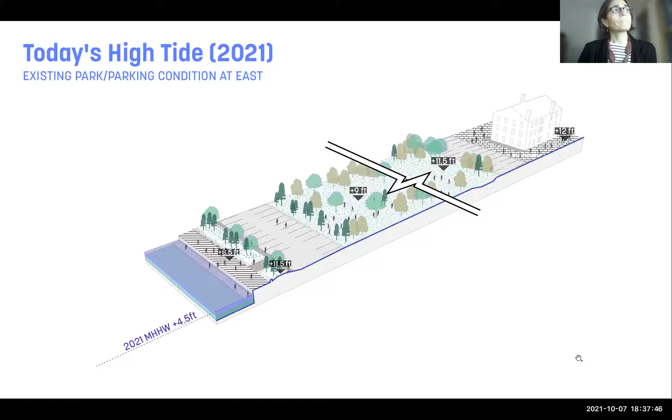In the future, with predicted sea level rise, we've looked at several models of this and have a consultant on our team, VHB, who's really been helping us understand what the best models for sea level rise to use are. The future predicted high tide, again happening twice daily in 2070, is at 8.7 feet. So you can see that will inundate the boardwalk itself and portions of the access to the boardwalk on the east side. And then, not shown here, on the west side of the park near the boat ramp, there are areas of the actual landmass that would also be in that daily tidal zone, again twice a day by 2070.

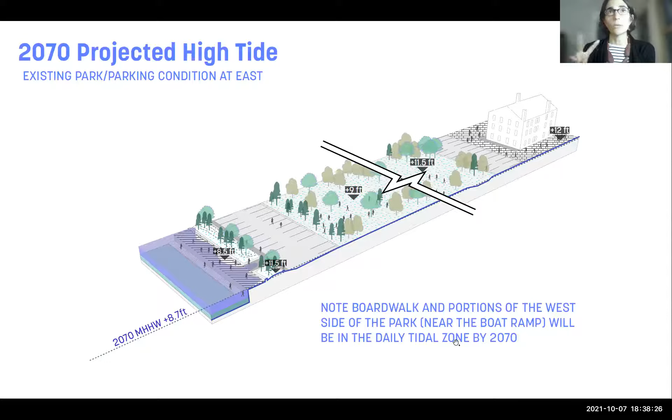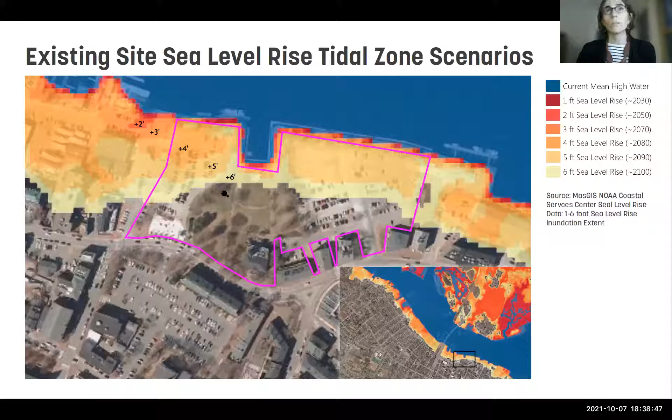And you can see here in this map that same condition, again on the existing site, showing that by 2070 there would be some areas of flooding on the west side of the park. Certainly all of the areas right along the shoreline at the boardwalk would be in the tidal zone. And then more areas in the tidal zone by 2080, 2090, and 2100.

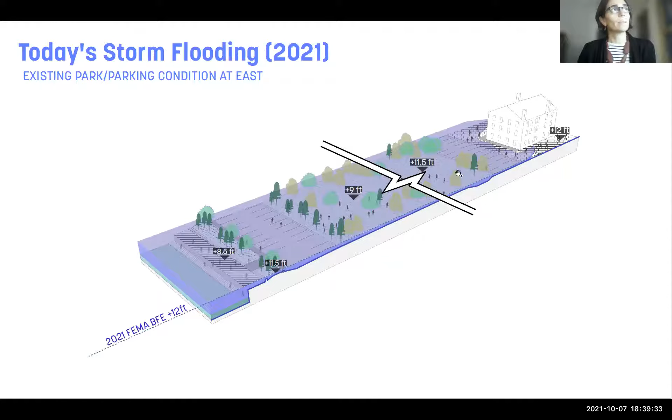So then the second piece of the picture when it comes to sea level rise and living in a coastal community is storms. This is showing the flooding extent for the 100-year storm, which means there's a 1% chance of that storm happening every year. You can see that elevation that has been set by FEMA for flooding is at 12 feet. So already today on the east side of the park area, you have flooding that occurs on the order of 4 feet or so at the lower elevations of the park, all the way back towards the street at lower elevations, or lower depths of flooding.

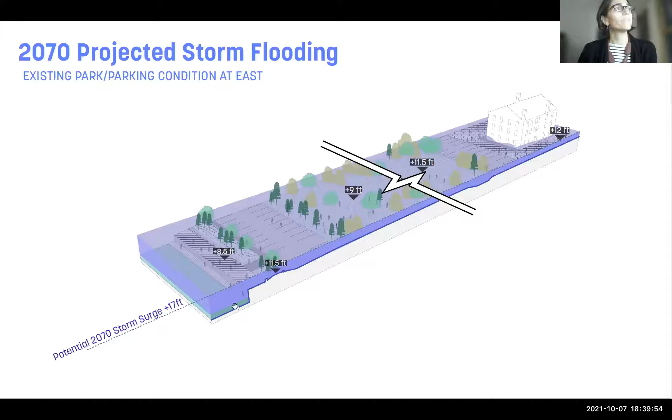Really the condition as you go towards 2070 with sea level rise, that projected storm surge gets up to about 17 feet, which puts that whole landmass under more like five and above levels of flooding. So quite a bit of flooding already predicted to happen on the site.

This map here really just puts that into context on the existing site. And what it's mapping is in 2070, when there's a storm, so during the 100-year storm, the depth of water that is expected across this site.

So you can see it's really quite deep, closer on the lower parts of the site, which are currently the boardwalk, and closer down to the water's edge, up to about 10 feet of water. You can see that inundation comes all the way in, past the street in some places.

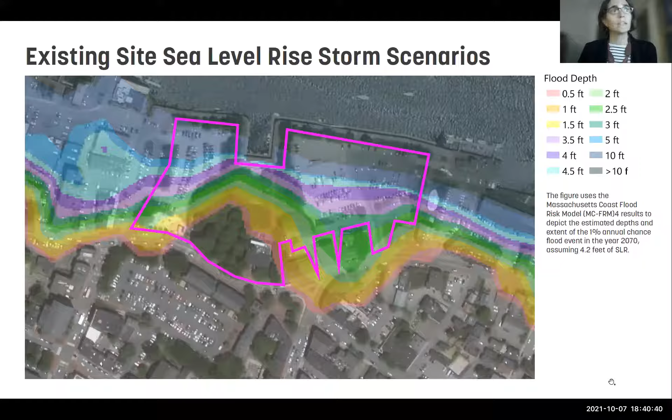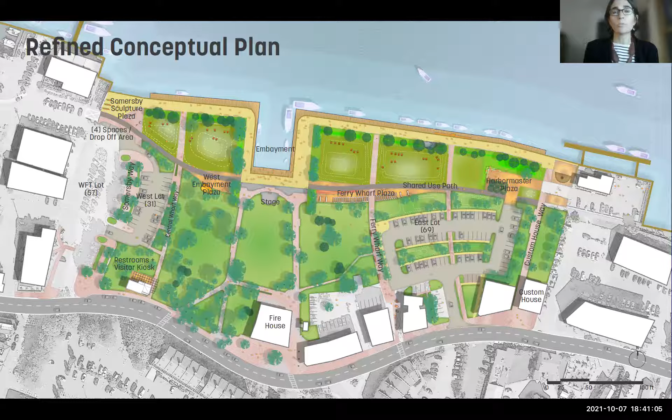These are models that are already widely circulated and trusted for coastal resilience planning throughout Massachusetts and beyond, and we've applied those to the design of the site. So this again is that site design. What we're going to do now is walk you through a series of diagrams showing how, if the park itself is the only thing implemented from a design perspective, tidal inundation and flooding from storms would affect the park. Then we can talk about future improvements as well.

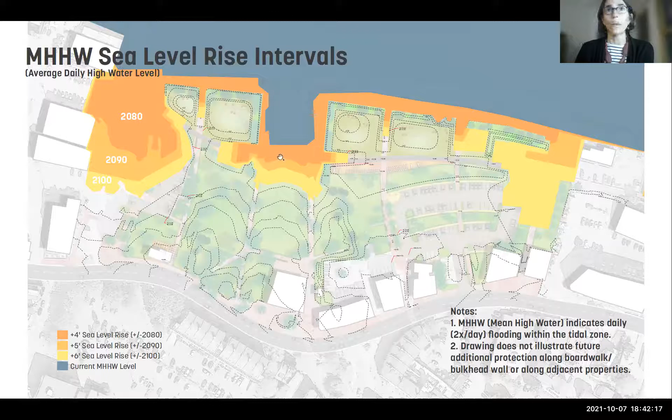And what this does is back off of that and explain a bit about what time horizons you can expect things to get wet, which is a useful way to think about it. So this is showing today's daily high tide—twice daily, water gets to an elevation of 4.5 feet. Currently that's really held back. There's a little bit where it comes in at the boat ramp, but otherwise it's held at the edge of that bulkhead wall.

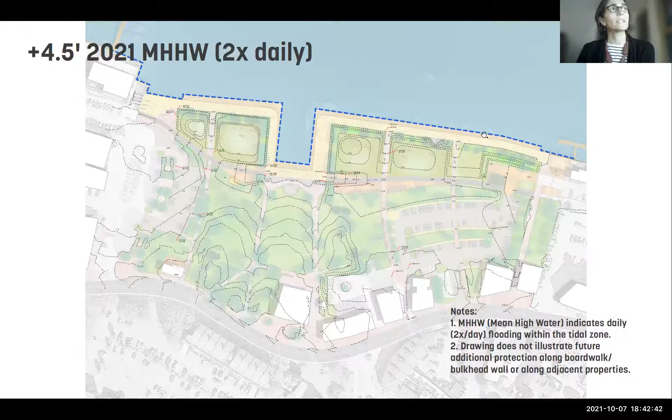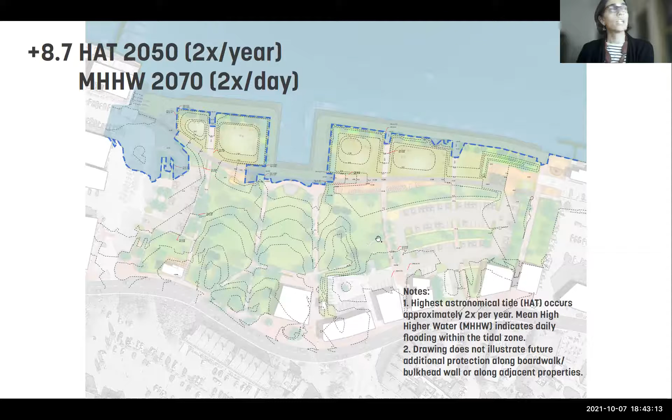In 2050, the highest astronomical tide, HAT, which occurs about twice a year, would bring water to this contour, 8.7. And then by 2070, that same area is getting wet twice daily as part of the average high tide. Again, this drawing doesn't illustrate any additional improvements except changes to the park and the grading of the park.

By 2070, twice a year, the highest astronomical tide is going to bring tidal floodwaters into a greater extent of the park, and you can see the ways in which that's happening. Again, no other changes are happening here in this scenario to the boardwalk or to the areas where the park has to stitch into that existing condition.

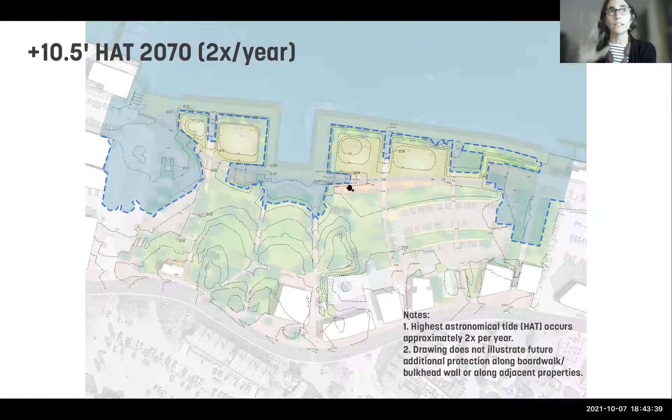So what this diagram is showing is the potential for additional improvements beyond the scope of the park expansion, and what kinds of things the city could consider in the future to further protect the park and city resources behind the park.

So the first thing to note is that future efforts to raise the bulkhead as well as the boardwalk could help with direct inundation from the river. All of these areas that are directly getting flooded from the river could be accommodated or brought out of the floodplain with changes to the bulkhead wall and raising that boardwalk. Minor changes to the park grading could accommodate a flush and accessible connection to those future raised assets. It's also important to note that a solution needs to be considered for areas adjacent to the park.

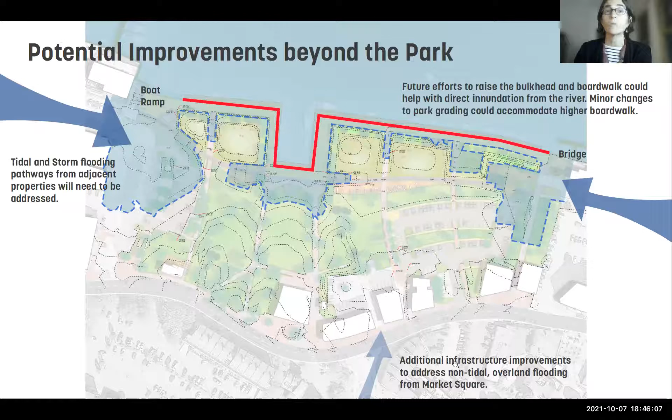Andy, do you want to talk through the bulkhead improvements project?

Thank you. Picking up on one of the comments I had made earlier, Kate has just covered how the park project is adapting and addressing sea level rise to the greatest extent possible right now, meeting adjacent grades. This diagram comes from the civil engineer who's been working on the bulkhead design. What you're seeing is essentially the bulkhead wall, that concrete structure.

And then at the top of that, there's a concrete cap. What's shown in white on the outside edge is an FRP, or fiberglass reinforced material, protecting the bulkhead wall itself. That's similar to what we did on the western side of the central waterfront already. The bulkhead project we've been talking about recently has been to extend that work across the rest of the central embayment and then the eastern section of the bulkhead wall.

But one of the concerns raised by the city engineer, as we discussed with folks, is: if we're doing this work now, are we hurting ourselves by having to redo it later on to address sea level rise?

If you think about those red lines there, those contours coming up with sea level rise increasing over time - what the civil engineer explained is that, generally speaking, in all cases we're going to be building off the existing structure. So we have the ability to raise that bulkhead wall now, but in doing so we'd essentially just be extending that cap, which could be done either now or at a later date by bolting or anchoring it down with epoxy bolts into the concrete. So there's the ability to do that either now or in the future, as the city may be able to based on funding and its own desired timeline.

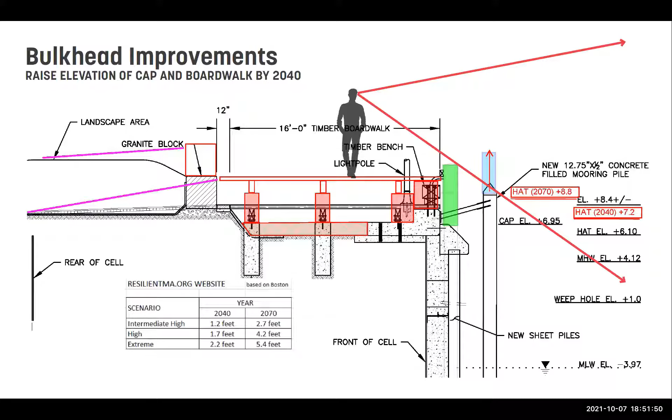So last but not least, we wanted to acknowledge that, especially during a storm scenario, we showed you some pretty significant inundation of the park itself. And remember, that storm scenario is really a 1% chance every year - so 1 in 100 years roughly that could occur.

But we're pretty familiar with planning parks to be occasionally inundated. And there are some really tried and true methods to ensure that a park can get wet and be resilient to that flood condition, emerging in the same condition it went into the flood.

So we just have two examples here. The Chicago Riverwalk, a Sasaki project that has really transformed Chicago's relationship with the river, was designed to flood. The Chicago River annually floods about twice a year, and all the areas along the Riverwalk are designed to meet that inundation and handle it. The way it does that is by keeping infrastructure out of the floodplain and employing durable materials that can easily be cleaned.

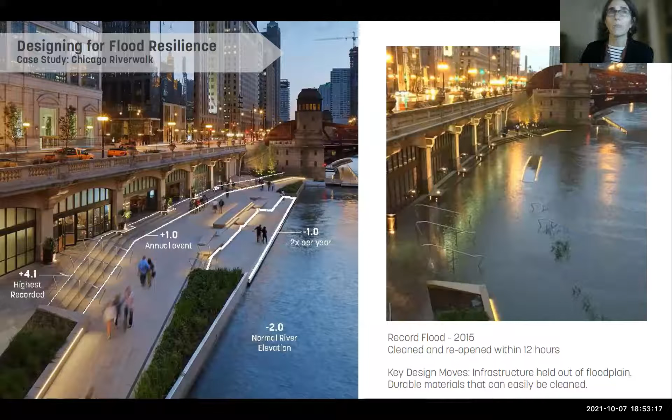The pictures here show a record flood in 2015, and the whole park was cleaned and reopened within about 12 hours. It's a pretty simple operation when you plan well for it, and the park can be resilient to it. The second park we wanted to note, a recent project of ours designed to flood again, is Cincinnati's Smale Riverfront Park. The nice thing about this in the context of Market Landing Park is that it's a much softer park than Chicago, so you can see the balance of green areas to paved areas and program space is really similar in lots of ways.

So again, this park was designed to flood. This is the record flood, a 100-year storm that flooded the Ohio River. The park was inundated for several days, actually, in this case, which is unlikely to be the case at Market Landing Park, where the flood scenarios are more like a couple of hours of high tide. Perhaps you have to endure a couple of high tide cycles in a big storm, but this park was underwater for several days.

There are significant measures that had been taken in the design process to ensure that infrastructure was out of the floodplain, the materials were durable, and that in some cases barriers were installed on the upriver side to prevent any flotsam from taking out structures. When the Ohio River floods, all kinds of things like old refrigerators and cars come floating down the river. So that isn't the case in Newburyport, but I think we want to acknowledge that.

Parks can be designed to withstand this kind of flooding, and there are specific considerations that we can make to ensure that Market Landing Park can be resilient when floodwaters inundate the park in the future.

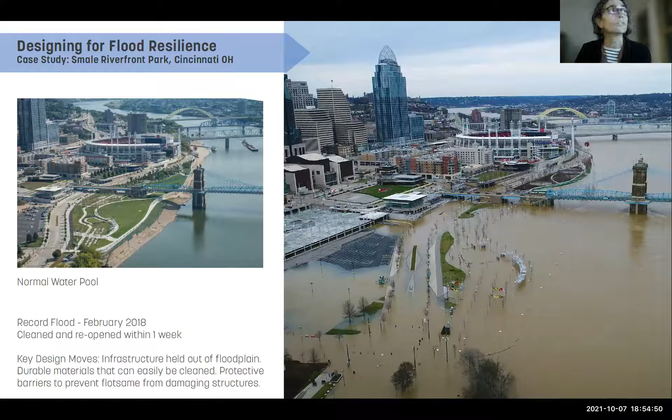So we have a couple of diagrams here also to answer questions about service and commercial fishing and ADA access that came up at our last meeting. We want to make sure that we're all on the same page with understanding some of these key moves that have been made in the design and planning of the park.

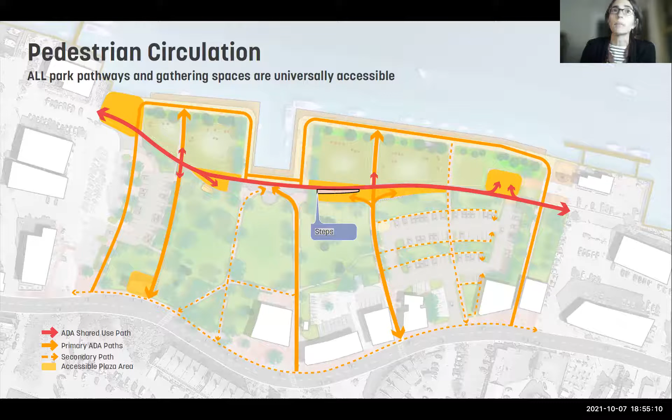I want to first start by noting there were several questions last time about ADA access and ensuring that the park could be universally accessible. We want to be clear that that is a core tenet of our design for this park, to ensure that all park pathways and gathering spaces are universally accessible. Whether you're using a wheelchair, pushing a stroller, or riding a bike, you can get there the same way as any able-bodied person on feet.

So all of the bold lines here, as well as all of the dashed lines, are showing universally accessible pathways. These are pathways that are either flat or sloped at a level that doesn't even require ramps or railings. Again, these are just universally accessible ways to arrive at the park. You can see that all of the gathering spaces, shown in yellow, are accessible by those pathways.

There is one area where there are steps in order to retain some of the grade as the shared use path drops down to meet the existing grade at the boardwalk. But both the upper and the lower levels of that would be accessible, so that there could be companion seating and opportunities to enjoy both experiences, no matter what your level of mobility is.

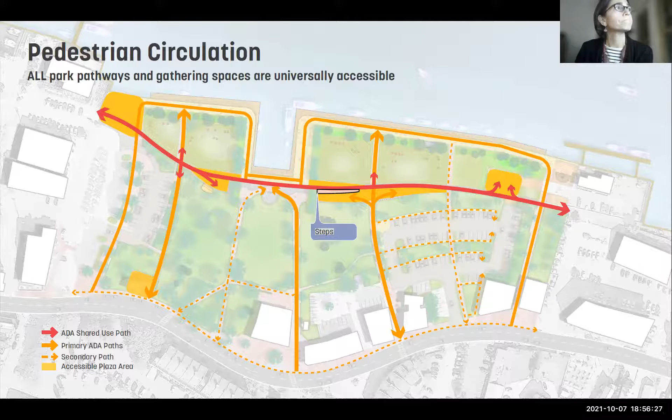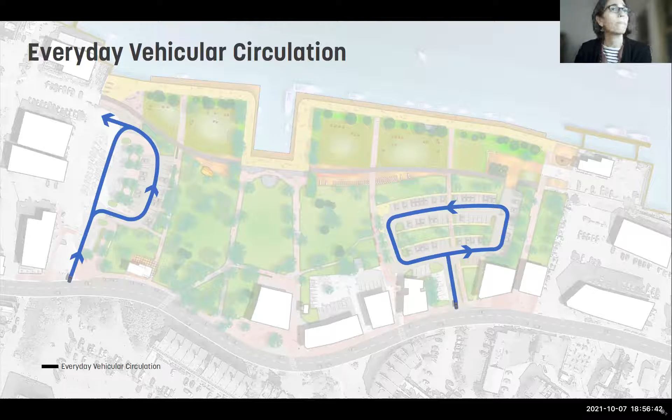The second thing we wanted to note here was the everyday vehicular circulation. You can see those two access points from the street and the ways in which cars can move fluidly around to find parking spaces and then move back out of the site, and the ways in which those would be accessed by those pathways we just showed you.

There were several questions that came up last time about the circulation and access specifically for the Harbormaster facility. We understand that there's a fuel truck, one of the largest vehicles that comes in there on a regular basis. This pathway is showing the outer extents - the bold lines are the outer extents of a fuel truck that would be able to turn and drive through there. So you can see we're studying the way in which that wheel pathway, as well as the outer extents of the truck, could be accommodated along a paved route for that turnaround and backing into the Harbormaster facility. Smaller trucks could use the same access route and be able to make those turns even more efficiently.

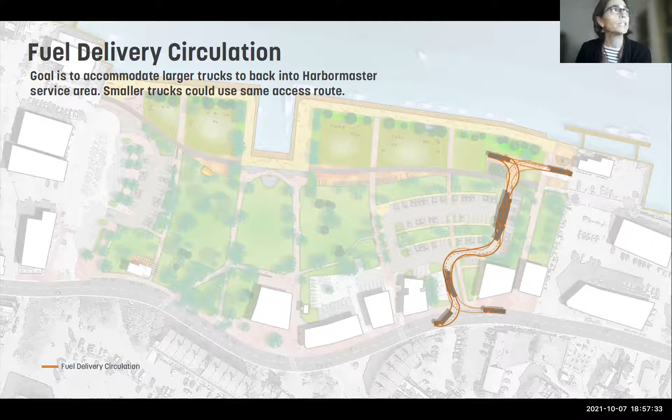We also wanted to note that fire truck circulation has been well coordinated with the fire chief. What we're providing here is a route for the fire trucks to get actually to the embayment where they need to be in order to fight fires that may occur on any boats at the dock. We've provided that access via the shared use path, as well as routes through the parking area. Again, the solid outer line depicts the outermost edges of a vehicle as it's maneuvering through that space, and you can see we're making every effort to ensure that that outer vehicle movement remains on a paved area, which can really accommodate it and be resilient to that vehicular load over the long term.

It's also worth noting that we understand the embayment is used as the winter area for certain commercial boating activities. So for specific loading and unloading of that use, we could also imagine that specific parking and loading access could occur on these same vehicular routes that the fire truck is using.

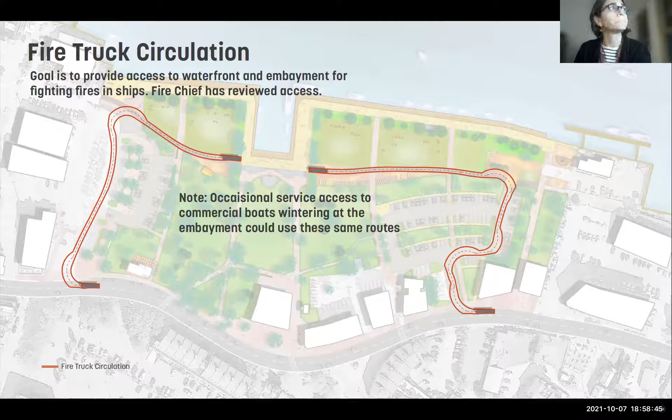There were a few questions last time, as well as in the comments we received, about the width of that shared use path and how it functions specifically for vehicular access and fire truck and emergency access. So here we're noting on that same rendering you saw last time that there's a 10-foot wide paved width, which is appropriate for a fire truck, as well as for everyday use of the shared use pathway.

And then there's a 2-foot shoulder. In some cases, that shoulder would be paved and rated for vehicular loading, and in some cases, that shoulder is reinforced turf. So again, it provides resilience to the occasional loading of a fire truck and other wheeled vehicles, but it also can appear grassy and feel soft and park-like on a daily basis.

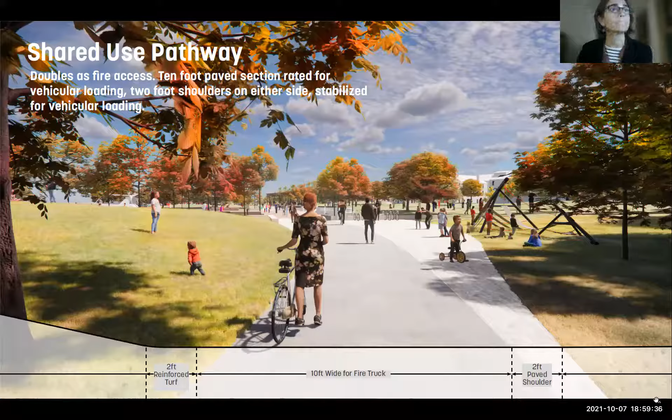So finally, we wanted to note that there were a few topics. Those were the two big ones we heard from you all about, as well as saw in some of the comments that came through, but there were some additional topics. We wanted to make sure we had understood and addressed all of the comments that had come through about the plan.

We received 24 specific comments through the online portal in response to the refined plan. I think it's worth noting that at this point in the process, it's really typical to see people who are very passionate on one side or the other respond, and most of the public who had been active in the process earlier start to fall away. So about 50% of those comments are positive, cheering on the design, or neutral, and about 50% of them are really specifically focused on a couple of questions or pieces of critique about elements of the design.

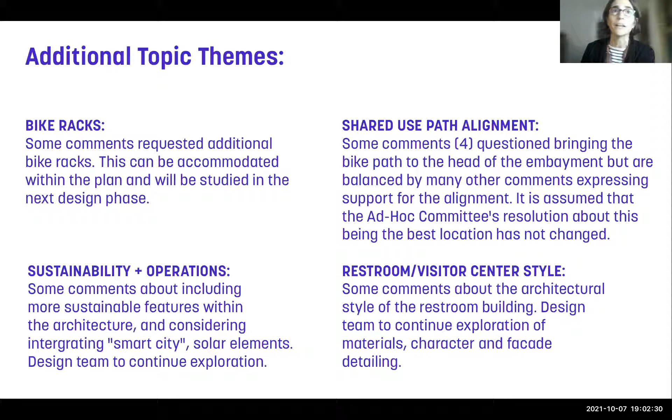Finally, there were a number of comments about sustainability and operations, and also some comments about the restroom and visitor center style. We will continue to address those and explore different options during the design development and construction documents phase, and feel confident that we can hear the comments and incorporate those into the design.

Finally, there was one additional question that you all had raised at the last meeting about additional maintenance costs, which could be expected related to the acquisition and operation of a new park within the Newburyport Park system. So we are offering 3 ways to think about this.

The first on the left is local precedent. The Waterfront Trust has reported a range of operating costs over the last bunch of years, everything from about $30,000 a year to about $85,000 a year.

The area of the existing waterfront park and the new expansion are roughly the same, so one can imagine that the costs would be pretty similar to what the Waterfront Trust is already paying.

Another way to look at this is Sasaki works with park systems all over the country, and we occasionally work with operations and management consultants. So we've borrowed a few numbers of typical park maintenance costs from other projects and applied those here. We have a park maintenance cost for lawn per acre, for hardscape per acre, and for ornamental planting beds. These are the primary features of the new park in Newburyport.

When we apply those numbers to the quantities of different landscape types in the park design as it currently stands, we get about $30,000 a year in maintenance costs. That's at the low end of what the Waterfront Trust is reporting paying, but certainly something to consider as part of your operational budgets moving forward.

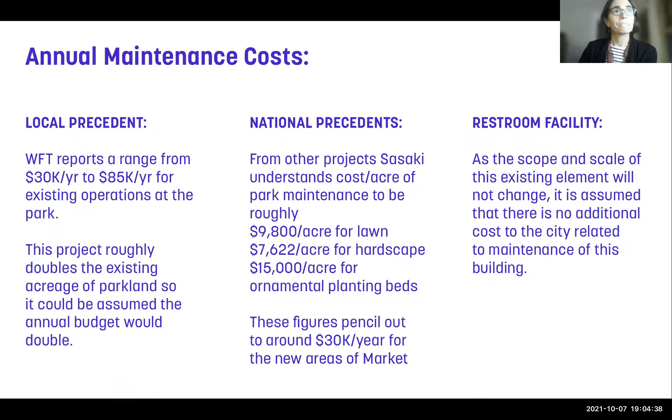Andy, do you want to talk next steps here? Yeah, thank you, Kate. I'll defer to the chair of the committee, but where we are right now is, as we discussed at our last meeting, Sasaki circled back based on feedback with the schematic plan they've developed. We went through several different concept plans that weighed various different issues that needed to be melded together into a refined conceptual plan.

The Waterfront Trust has confirmed that they support the plan. There are a few comments they had added. The Harbor Commission, same thing. When I spoke to Paul Hogg, the harbor master, he indicated that they do want to take a look at the dimensions where the crane is, but they're very confident that's just a minor question of making sure the exact dimensions are right. But they have every confidence in the project as it's been designed, and they don't have issues with access, if you will.

With that, I think what we're hoping for is that the committee here can confirm that Sasaki has done a good job on the schematic design that we've all been looking to bring together, so that they can go ahead and do detailed design plans suitable for construction. We're obviously going to have more involvement of this ad hoc committee in review of the park design, the Waterfront Trust, and all the stakeholders that we've had involved during the design process that Sasaki's done thus far.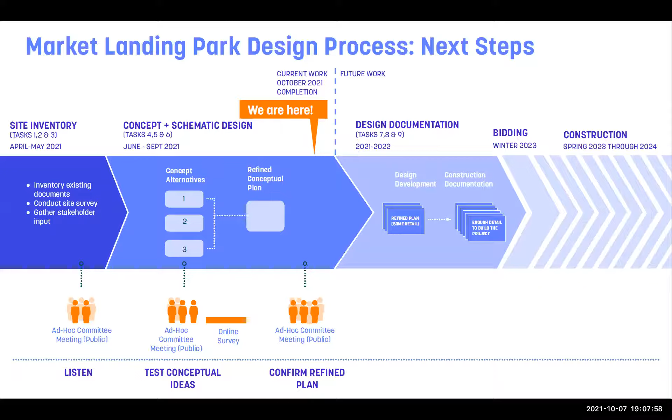Yes, thank you. I see that Mayor has joined us. Mayor, did you want to say something? We're going to bring it back after public comment.

Thank you. No, I appreciate that. I apologize, I had a different time for this meeting on my calendar, so I apologize for jumping in late. A couple things. In terms of where the dumpster is now for Sea Level Restaurant, that was a concern raised by the restaurant owner, and obviously that's a really important function for the restaurant.

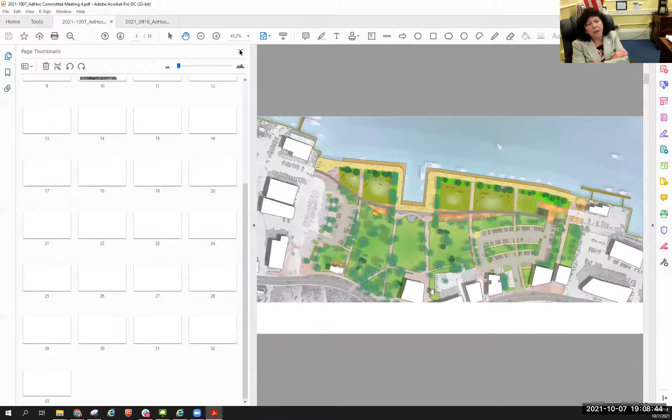I've also had numerous concerns about trucks coming in down, if you're facing Sea Level on the right there, which would be Ferry Wharf. It's not marked. Next to the firehouse, that path there, that is where oftentimes cars will come in inappropriately, or they've been having deliveries come in and taking out the street signal there. And so I would ask that there would be a way for deliveries, if possible, to come in by the dumpster. There's a brick path there now. Could that be opened up so it could be a way for them to get deliveries in, as opposed to the system they're using now?

Yeah, Mayor, if I could, we actually discussed this earlier today even, and there's agreement that we can adjust the trail there to provide a better access to the dumpster location, which is being maintained. There are some mature trees there and a bit of a grading change that might preclude us from making a full width path, if you will, like elsewhere in the park. So what we're trying to do is make sure that they still have the access they do to the dumpster area, possibly more convenient, obviously, than they do today.

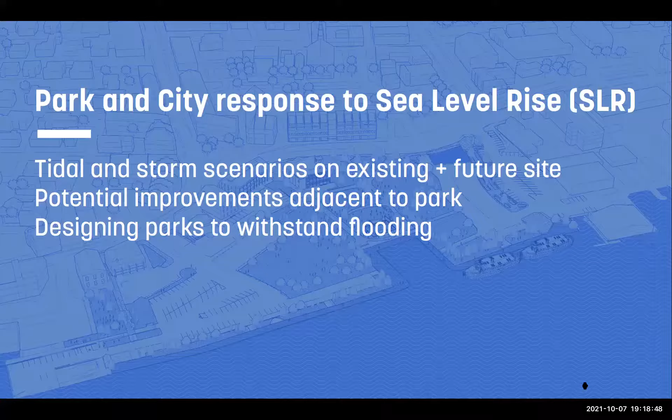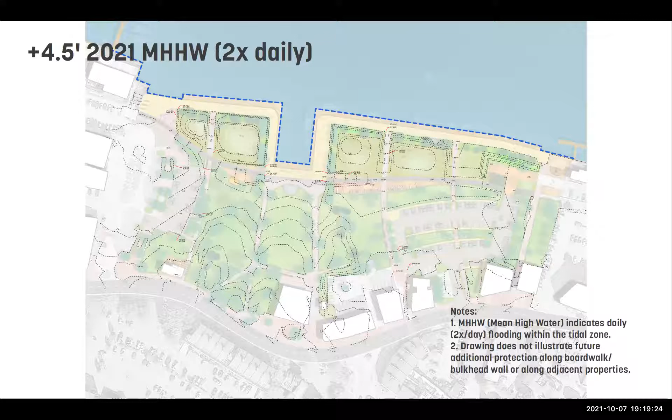Raising that to the top of the timber bench where that silhouette person is sitting provides a lot of benefit. It's just a little different design than the rectangular concrete filler material that Andy had shown, which came from the engineer. So all I'm saying here is that another option the engineer has is raising that cap about 2.5 feet, so the top of that cap is where the top of the timber bench is. To resolve that, in my opinion, quite easy.

We can put up a new pipe rail so they can still sit on that. Their feet will extend a little bit further. That's okay, maybe we put a pipe rail on the cap. Those are things that I want the Waterfront Trust to not deter from the practicality of, we need to move forward as much as we can on resiliency now, because we're going to spend a lot of money citywide on resiliency, and not doing this because of someone not being able to sit is, in my opinion, not the way to go. I'm not saying the Waterfront Trust is saying that's the way to go, but I'd like to take that completely off the table because there's ways around that. So I just want to throw that out. I think that's very important. And I think the boaters will benefit from a raised cap, even though it's only a couple feet. There'll be surge and the boats will be rising and the lines will be tightening up. And I just think it's a good idea. So whatever we can do now will help.

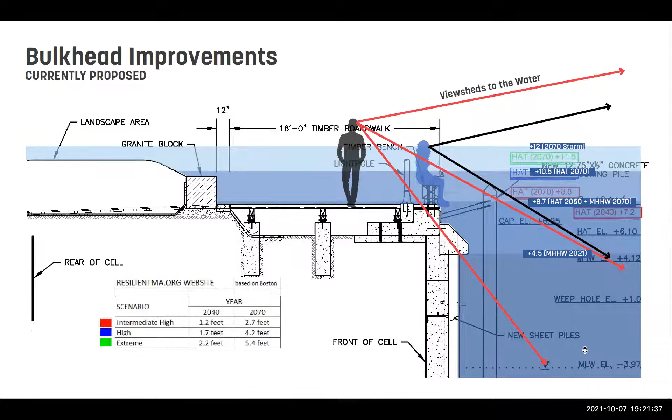Andy, you didn't happen to take my sketch to present to this meeting? I do have a copy of that, I can pull that up. This will just take a minute, Councilor Ackerman. All it is, is replacing the 3 parallel parking spaces with 7 head-in parking spaces. It doesn't really change much from the layout, and doesn't change hardly anything for the access to the waterfront parking on the west lot.

Generally, I'd like to get people's opinion, but a lot of people go there and park head in, they sit there for lunch, it's a kind of a popular spot. It's easy, you drive in, and right now there's 4. A lot of us park where you aren't supposed to park in front of the boat ramp because you're only sitting there temporarily. So I kind of like this. I was curious what people on the committee think of this.

One of the balancing points raised in relation to this was the distance between the cars and the shared use path - the idea of having cars coming and going quite frequently from that space and potentially having their bumpers go over the curb line. We do have a guardrail over at Michael's that is along the shared use path there, but that's not obviously the preferred landscaping, if you will, next to a path or a buffer. There is the ability to potentially fit these cars in there, but there was a concern about that. And then the ability for folks - I'll defer to the Waterfront Trust or parking clerk or others who may want to weigh in - but there has been, at least to my understanding, some concern that we maintain or have at least a few spaces associated with the park, even as expanded, and we removed some spaces where folks could nose in towards the water's edge.

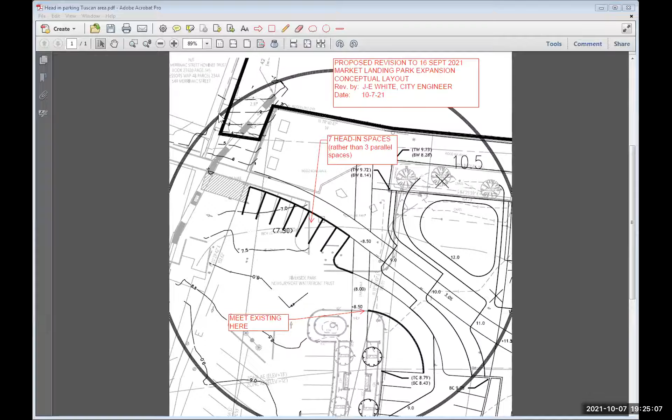I don't want to belabor this any longer, but I do throw that out there for people to consider. Jon-Eric, your point is well taken, and the points Andy is making are also well taken. I believe this is something we can solve in the construction documents phase, understanding there is some need for parking and a desire for at least some of it to be head-in, but also that there be a buffer to allow for safe passage of pedestrians and cyclists along the shared use path. I believe we can find a balance with some design study and continue to work through this in design development and construction documents phase.

Well, thank you very much. My final comment about the grading: if we do succeed in raising the cap of the bulkhead, and whether or not we get a ton of money completely out of anyone's expectation, any redesign to Sasaki's project right now, any redesign to raise a boardwalk a couple feet for all these walkways, it's easily accomplishable because of the way they have it designed.

The sides of the shared use path right now are all earth-filled areas. So any changes to the bulkhead or boardwalk, if we get lucky with a lot of money, I would deal with Sasaki's changes later. I just throw that out. It should never be a showstopper that if we can raise the boardwalk now for some miraculous reason that we have money, that we don't stop Sasaki. We just give a change order to raise it a couple feet. It's not a big deal.

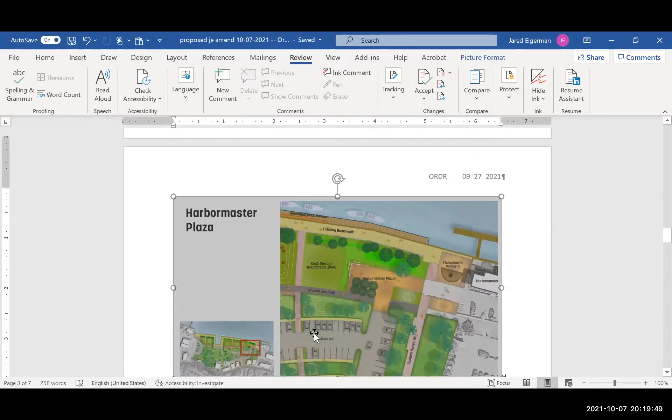Jon-Eric White: Real quick, I just want to make sure the councilors are aware that I've been doing construction projects put out to bid for 3 decades plus. When Kate puts together a proposal, I'm supporting whatever she puts together, but we all need to be aware that a lot of times the funding is not in sync with the percent deliverable. So 60% design does not mean you spent 60% of the budget. The joke we have internally with engineers is 50% of the design budget is going from 90 to 100% design. That's the reality, and that's why it's been vital to have you on this, and also why we have Kim Turner, the chair of our Parks Commission. We hear you. It's just, we're not gonna be able to solve it tonight.

Counselor Shand: I don't even know if my share screen is working. Is it working? It is, I can see it. Thank you. All right, I gotta toggle back so I know who's talking and all that good stuff.

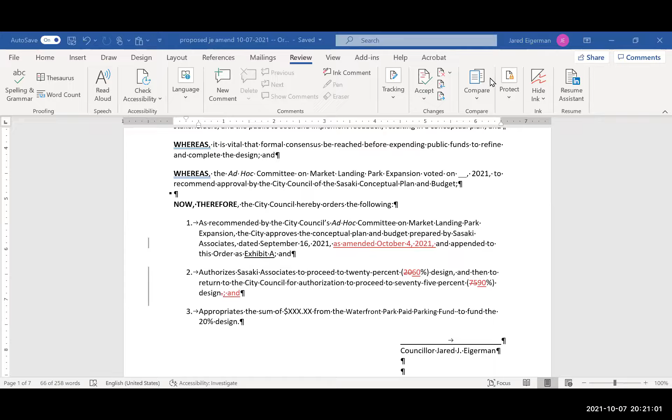Anyone else before we vote? Just on that document, Jared, I think you also need to fix the words, you fixed the numbers, but the words written next to them are a Scrivener's error. You wrote it, you changed it to 60%, but to the left of it, it says in words 20%. So just make the words and the numbers the same. Right, okay, I got it, I just changed it. And I'm gonna change the URL too, I don't have it yet, but I will.

Okay, I'm gonna do roll call. On the motion, Councilor Z, yes. Councilor Shand, yes. Councilor McCauley, yes. And I'm a yes. All right, great.

I really want to thank everyone. This is exciting, make no mistake, but also I want to say I believe that this committee, both voting members and non-voting members, has a high degree of confidence in the work of Sasaki Associates, and that has really made a difference. I just want to say that on the record.

How about a motion to adjourn? So moved. Hold on, so we voted on the amendment, don't we have to vote on the order to bring it out? Oh, well I thought it was a friendly amendment, but that's okay, we can do that. I don't want there to be any ambiguity in the record.

We'll vote again. So as amended, on the resolution of the full council: Councilor Z, yes. Councilor Shand, yes. Councilor McCauley, yes. Councilor Eigerman votes yes. Thank you.